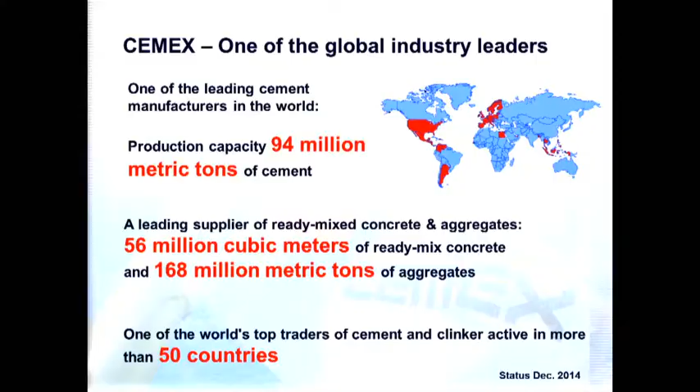We are a global building material producer with 94 million tons capacity in cement production, and also 56 million cubes of ready-mix concrete and almost 170 million metric tons of aggregates, which we are producing and selling worldwide in more than 50 countries.

In Latvia, we have a production capacity of 1.6 million tons of cement per year in our cement plant in Brocēni. We have 7 ready-mix concrete plants in the cities shown here, Riga, Daugavpils, Madona and Brocēni, and 4 aggregate quarries, some of them recently acquired, in Madona, Tukums and Talsi.

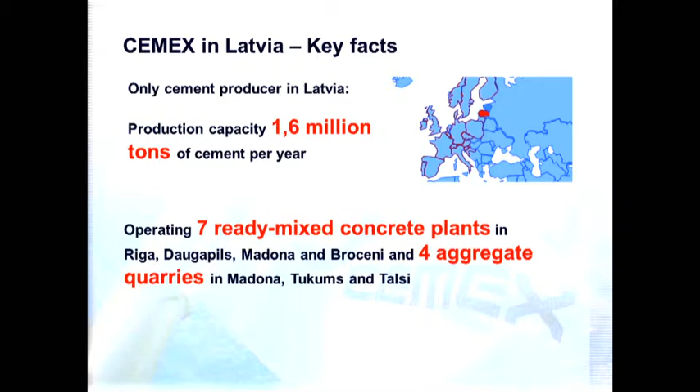The Brocēni cement plant, which started in 2009, was a major industrial investment in Latvia with 270 million euros, and an additional investment in a cement export terminal in the port of Liepāja.

So what can we offer to the construction industry? What is a customer, first of all, expecting from construction products? We discussed that, or it was presented in the morning. Of course, the product should be according to the relevant standards, in our case, cement standards or ready-mix concrete standards or aggregates as well. That should be the basis, the basic requirement.

The customer is expecting high quality, of course, so if the standard, for example in cement, leaves certain ranges for parameters, then the customer is usually expecting a high level of quality, which is also important to achieve with your product. High durability, usually in order to reduce maintenance costs. We saw in the previous presentation how building maintenance later on can affect the total cost of the building.

You may look for an innovative product. I will show you later a new product for road construction, which we introduced recently in Latvia or in the Baltics. You may look for an easy-to-handle product, like not only standard ready-mix concrete but self-compacting concrete, which reduces the manpower needed. And of course it should be competitive, so price-wise it should be competitive to alternative products or solutions.

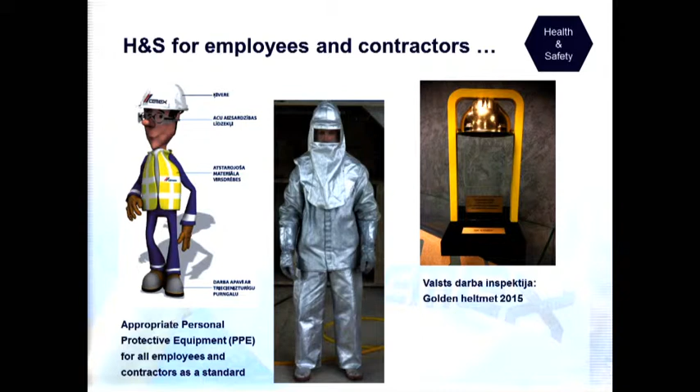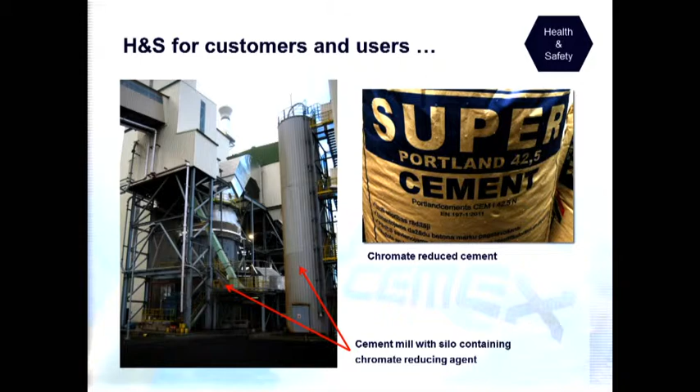But looking at other groups, what about health and safety for customers and users? For example, one point which not everybody is aware of all the time is that in Brocēni and in our cement plants we are usually reducing chromate in the cement. This is our cement mill. Here is a silo, especially for a substance which we are adding to the cement mill in order to reduce the chromate content in our cement, in all our cements, bagged and bulk cement.

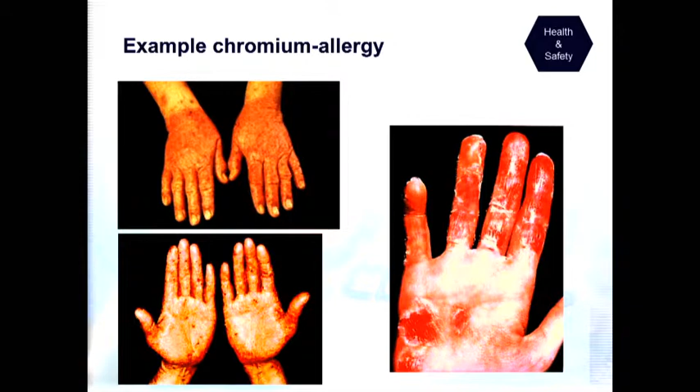And this is what chromium can do. Chromium was some time ago a problem in leather gloves, for example. Also, there is some chromium or chromate 6 in the cement if you don't treat it. That's why several countries have regulations regarding chromate reduction. By the way, it's a European directive, and it's also included as a regulation in the European Register for Chemicals, that in cement the content of soluble chromium 6 should be below 2 ppm.

The basic requirement is that it should be for cement handled manually, so mainly bagged cement. But of course, even if cement is sold as bulk, somebody could be in contact. That's why we are reducing all our cements like this. In Finland, it is a general requirement. In Latvia, the basic requirement is only for bagged cement, but nevertheless, as I said, we're doing it for all the cements. In Russia, there's no requirement at all. Belarus is the same.

So if you look for cement, you should also look for these aspects, which are not a requirement of the cement standard, by the way, but of these additional regulations. So we are looking at these aspects to protect not only our employees, but also our customers and users of the cement. We are also looking at safety for contractors and the public, especially when it comes to traffic.

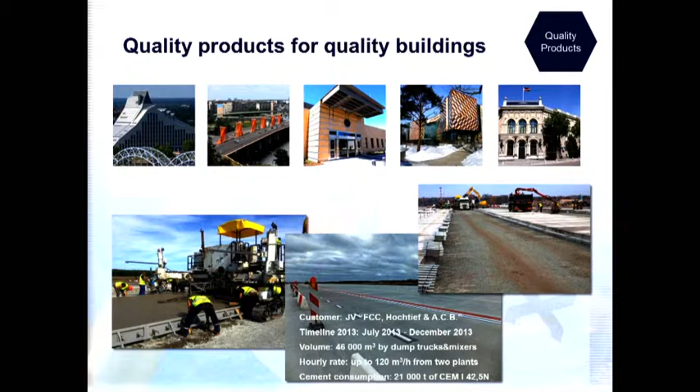What I mentioned in the beginning as a more innovative product is this one, so-called roller compacted concrete. We introduced this product in Latvia 2-3 years ago. It is already known in other countries for a while. In Canada, in the US, it is used, in the UK even. So it's a proven and durable solution for roads or for traffic areas which you want to pave somehow.

Of course, when we introduced it here, there was a discussion: is it suitable for the weather conditions here, freeze-thaw resistant, and so on? So to show the performance of this product, we have paved 500 meters in our quarry near Saldus with this material. This is a road which has approximately 500 truck movements per day.

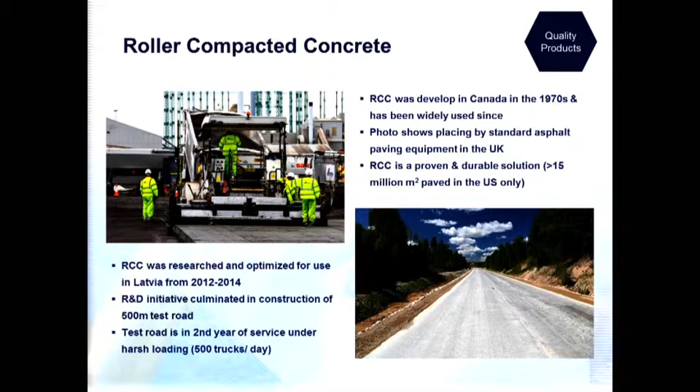This road is also equipped with several sensors and measurements, so that we really can track the quality of this road during these years, so that we have really a reference and proven data about the durability, strength and quality of this road.

Another point is that since 2014, the CELU specifications, the technical rule, require that if there is a road-based stabilization, the mix of gravel or recycled material with cement should be prepared in a mixer, not just the cement or binder, which could also be hydraulic road binder, so that this material is pre-mixed before it's introduced in the road.

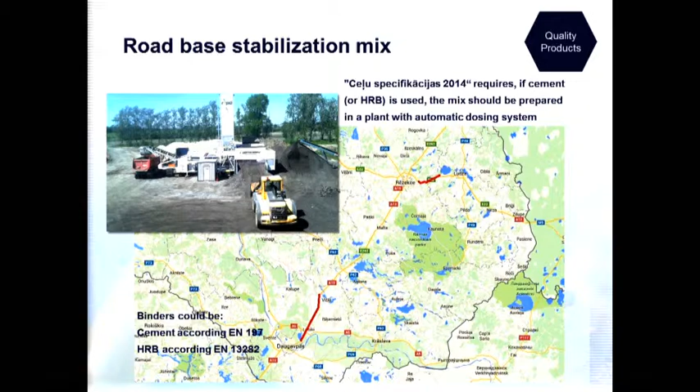For this purpose, we have bought this mobile rapid mix machine, which was located in the south of Latvia, where we have produced this mix for road construction works. You see near Daugavpils and also in Rēzekne something was done. So that's maybe not completely new technology, but an innovative approach here for road construction to get better roads, more stable road bases, and to improve the quality of the building or road in this case.

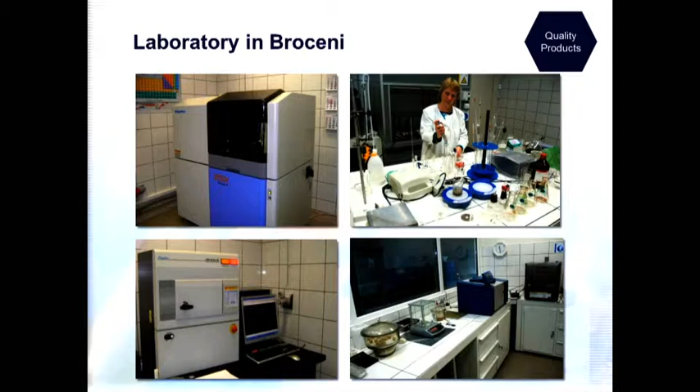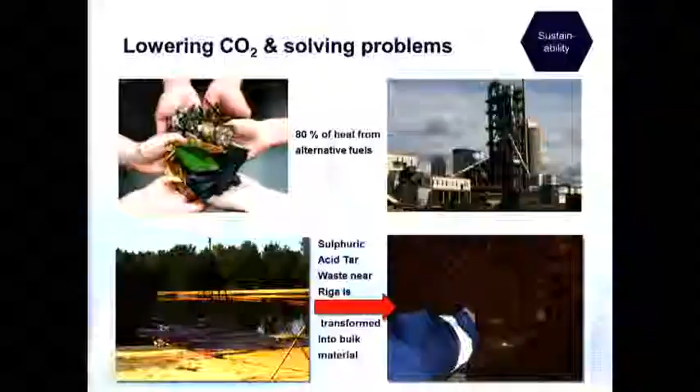We are controlling, of course, our products in our own laboratory in Brocēni, a modern lab equipped with all necessary achievements. We are also looking for CO2 reduction in terms of sustainability. We have substituted 80% of the primary fuels which a cement plant needs by alternative fuels, and we also try to use material from Latvia and to solve problems. For example, we have used roughly 40,000 tons coming from the Inčukalns lake, so not only substituting primary fuels and saving natural resources, but also solving environmental problems locally.

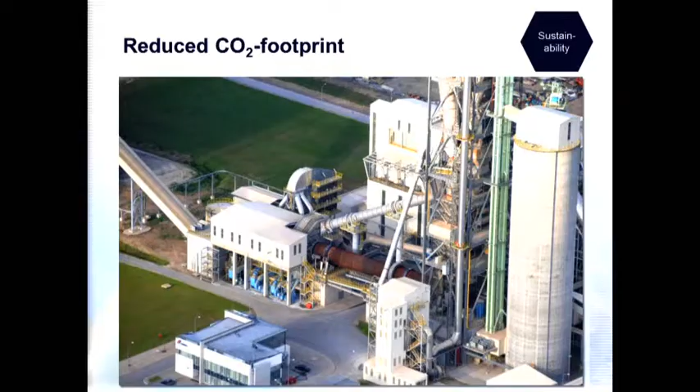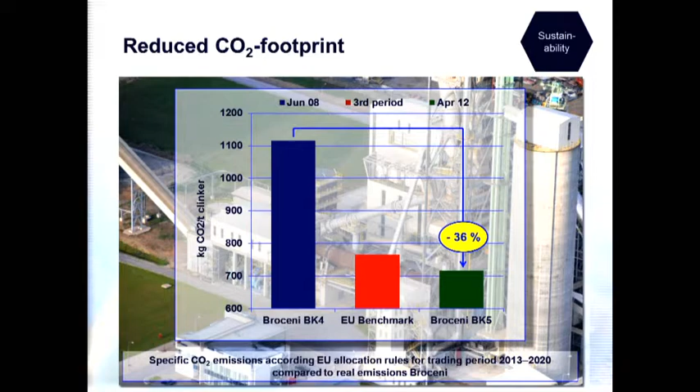I will speed up a little bit. This is from some KPIs regarding CO2 emissions. Cement is a very energy-intensive process which produced in the old plant more than 1,100 kilos per ton of clinker, and that was reduced significantly in the new plant. If you look at the impact, we have reduced the CO2 emissions from cement production by an amount equal to the emissions of 200,000 cars driving 20,000 kilometers per year.

So CO2 footprint is also becoming increasingly important for building materials products. We received an approved environmental product declaration for this parameter. We are offering logistic services, of course, pumping, transport of cement. Our cement trucks can be used as extended silos, so the truck can stay longer on site. Laboratory tests can be done in our facilities.

We have technological support, not only in Latvia. We have a research institute in Switzerland, and one of our group companies is dealing with admixtures in Germany. So there also additional information can be given and testing can be done.